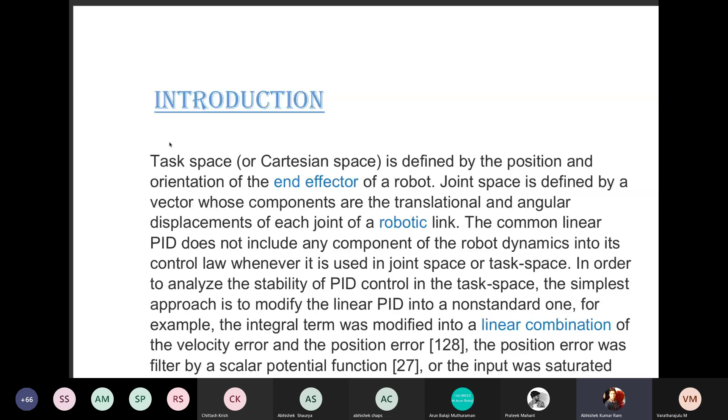Joint space and task space regulations are two of the most common control schemes for robot manipulators. Since the final control goal is normally in task space, it is more natural to design a robot controller in task space. Task space PD control is the simplest scheme to control robot manipulators.

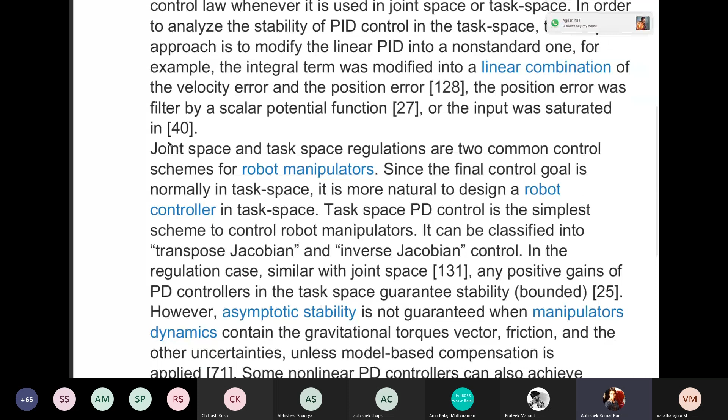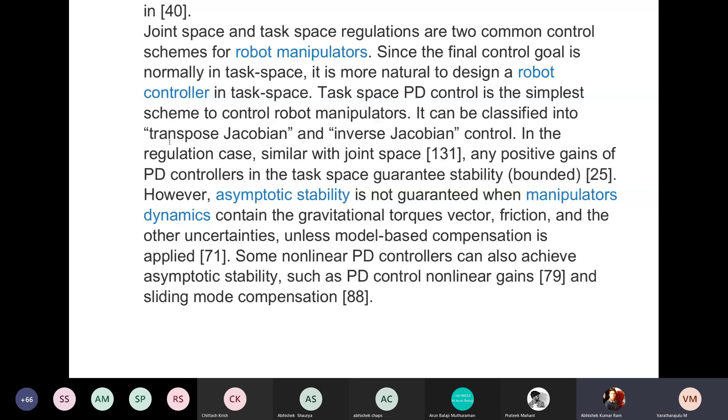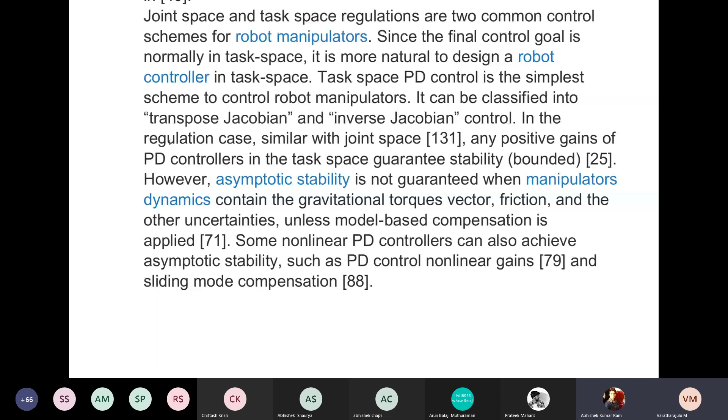It can be classified into transpose Jacobian and inverse Jacobian control. In the regulation case, similar to joint space, any positive gains PD controllers in task space guarantee stability bounded. However, asymptotic stability is not guaranteed when manipulator dynamics contain the gravitational torque vector, friction, and other uncertainties, unless model-based compensation is applied. Some nonlinear PD controllers can also achieve asymptotic stability, such as PD control with nonlinear gains and sliding mode compensation.

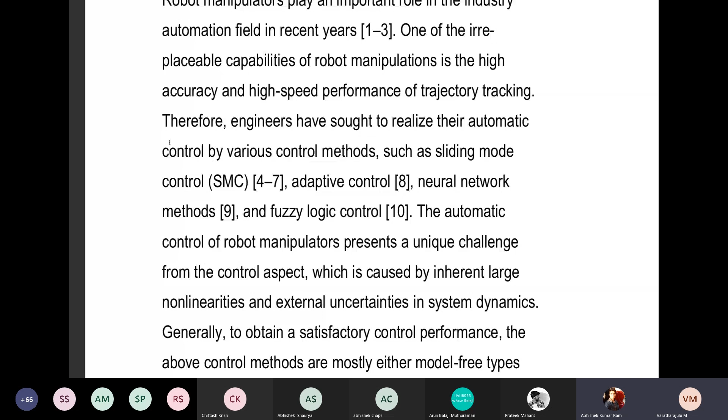Now let me give you a brief introduction regarding task-space robot manipulators. Robot manipulators play an important role in industry automation in recent years. One of their irreplaceable capabilities is high accuracy and high speed performance of trajectory tracking. Therefore, engineers have sought to realize automatic control by various methods such as sliding mode control, adaptive control, neural network methods, and fuzzy logic control.

The automatic control of robot manipulators presents a unique challenge from the control aspect.

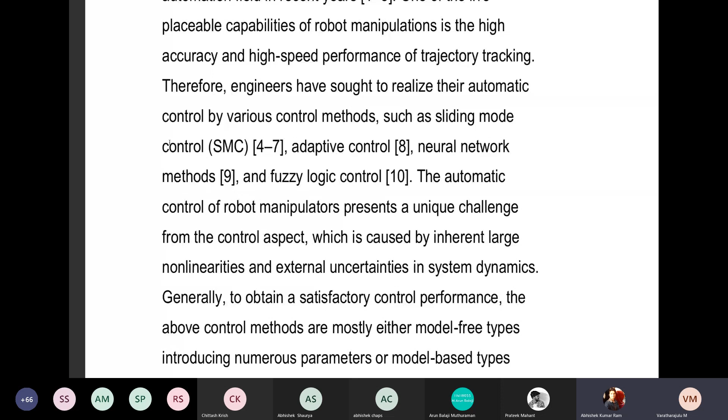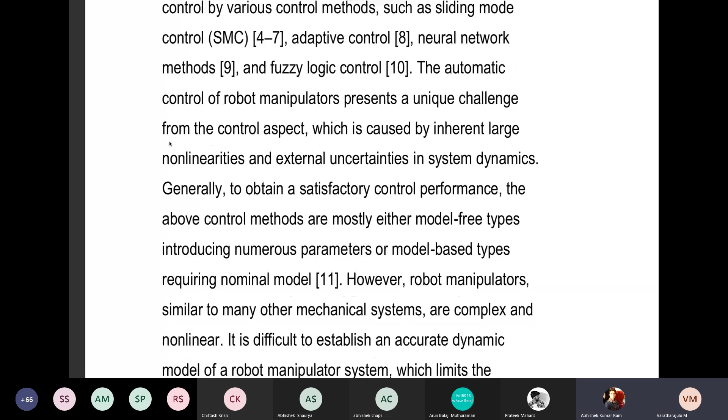Concerning neural network methods and fuzzy logic, you can find some papers in my name also. I have worked on fuzzy logic and neural network, which is categorized as AI, artificial intelligence. You can go to Google Scholar and search my name with fuzzy logic and neural network, you will find some papers. Okay sir, go ahead, it's a very interesting topic related to artificial intelligence.

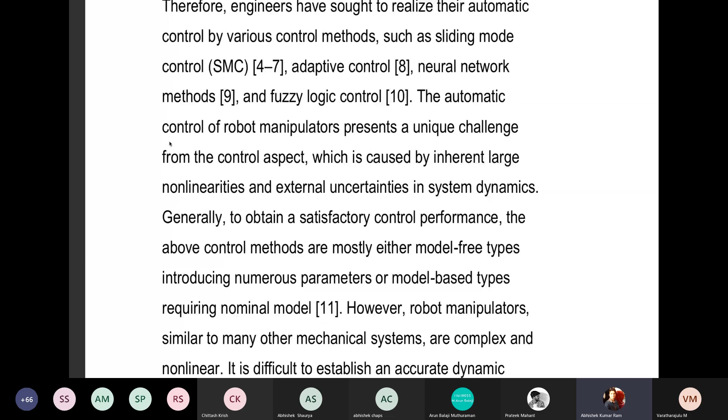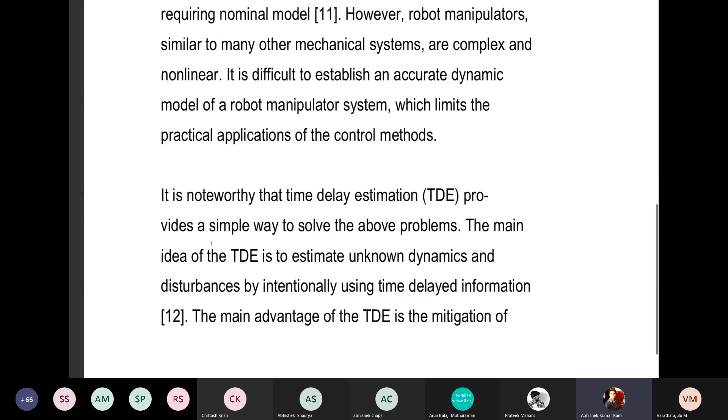With this note, I end my introduction on task space and hand over to my teammates so that they can present the next topic. Thank you.

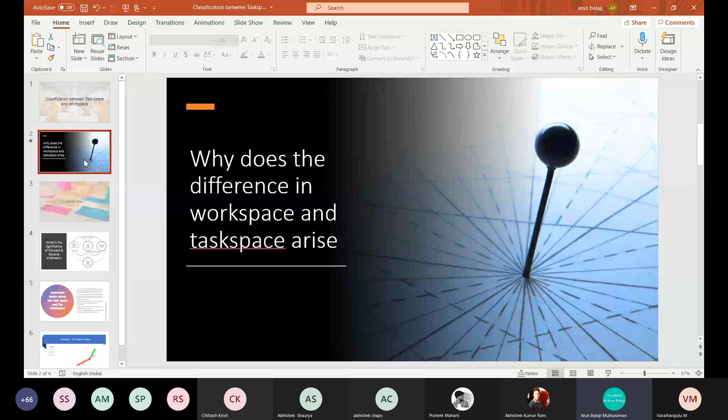Next, it's time for an activity. One simple activity: what will be the workspace for a hand? Can anyone come up with an answer? A normal human hand, right hand.

Anyone, can you please come up with an answer? Sphere. Yeah, sphere. Okay, you're correct.

So according to this, you can even have a right hand behind your back, right? Because the workspace is here and behind your back is also part of the workspace. But can you write at that point?

Writing, is it possible? Yes or no? Yes, you mean you can write with your hand behind your back? Yeah. Okay, maybe you're one special kind of human being. But it is very difficult, and 99.99% of the time you can't do it.

Therefore, behind your back is not a task space. Just in front of you, 25 centimeters below your eyesight, is your writing space, and that is the task space. Exactly.

Next one, Abhishek Kumar Ram also told us something about joint space. What is the relation between a joint space and a task space? From joint space to task space, we use forward kinematics, and from task space to joint space, we use inverse or reverse kinematics.

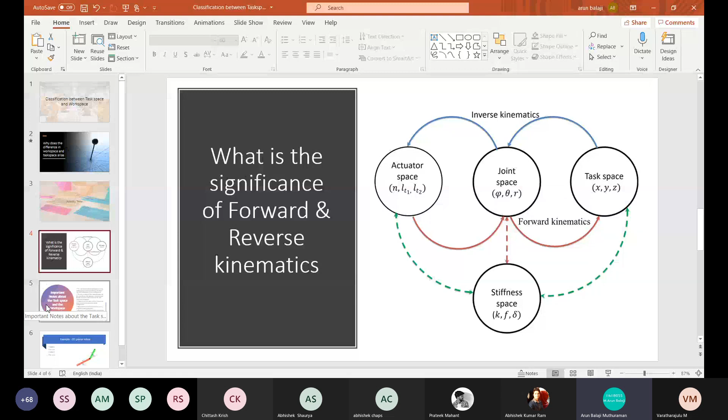Next, I'll sum everything up and we'll come to a common conclusion. Important notes about the task space and the workspace: task space and workspace relate to configurations of the end effector of a robot and not of the entire robot's configuration. Yes, that's true.

If there is a 2D linear robot with just two linear joints, linear links with rotational joints, then it is same as having four links which sum up to the same length of the two links with rotational joints all linear. They are the same, right? But their configurations are different. End effector configurations are a bit different.

Hence, we cannot talk about a robot by just knowing the task space and the workspace. Next, the user can decide that some freedoms of the end effectors, for example its orientation, do not need to be represented for the task space and the workspace. Like I just gave you an example of a laser: the rotation along the axis of the laser need not be mentioned because that is not of any use for a task space.

Next, we have a point in the task space or the C space. C space is nothing but configuration space. It can be reached by more than one robot configuration. We all know forward and reverse kinematics diagrams, right? It is same as going from 1 to 1 in the Cartesian plane: 1,1 to 0,0; 0,0 to 1,1; 1,1 to 1,2; 0,0 to 0,2; and 0,2 to 1,2. It says the same thing over here.

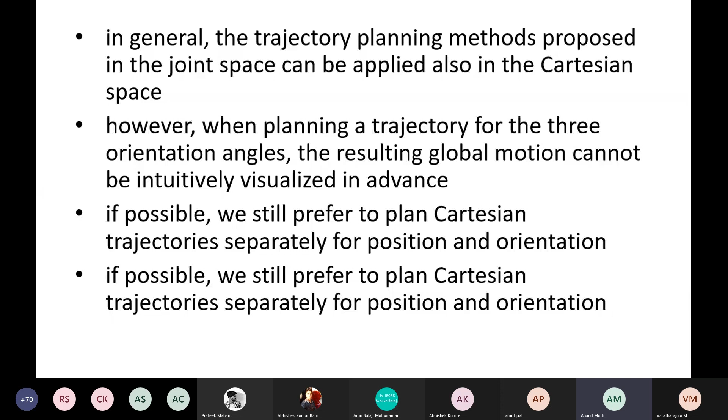A very important concept in any trajectory is interpolation, and one part of interpolation is polynomial interpolation. If we assume a function of points, let's take the example of q(t), which is a third order polynomial, there are four variables: A, B, C, and D. For us to solve this equation, we need four constraints: the initial point q0, the end point q1, the velocity at the initial position, and the velocity at the end position. We can find the velocity easily by differentiating the first equation.

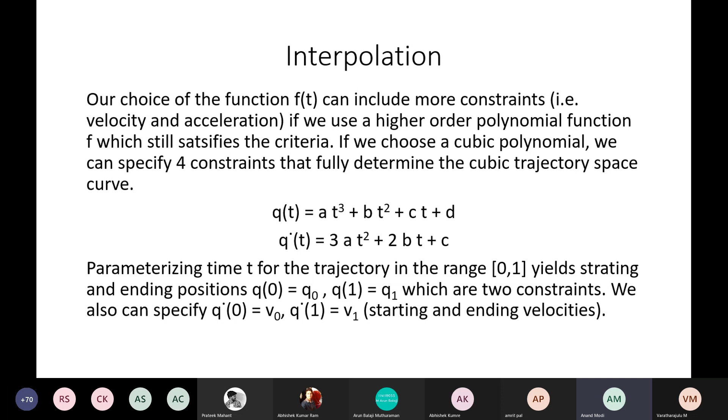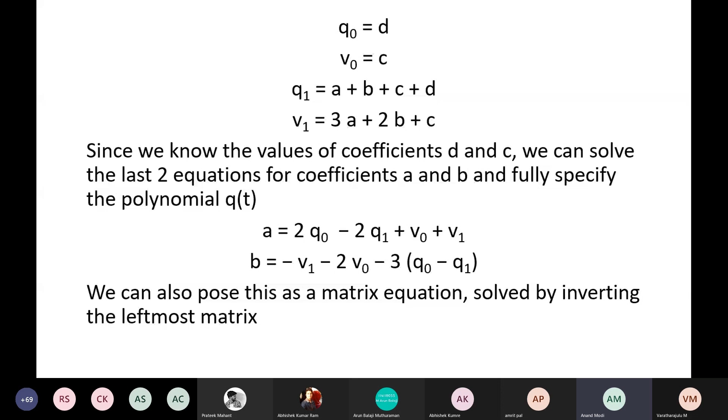A very important thing here is that we are parameterizing the time limit, which is in the range of 0 to 1, which can be considered as 0 second to 1 second. Since we have these constraints, we can easily come up with values for variables C and D, and also form equations according to Q0, V0, Q1, V1, which result in the following four equations. Since we have the values of C and D, we can express A and B in terms of V0, V1, Q1, Q0, giving the following two equations. This can be solved using normal linear algebra with matrix manipulation.

This is the function in which we equate the constants to the variables, and by taking the inverse of the matrix, we can find A, B, C, and D.

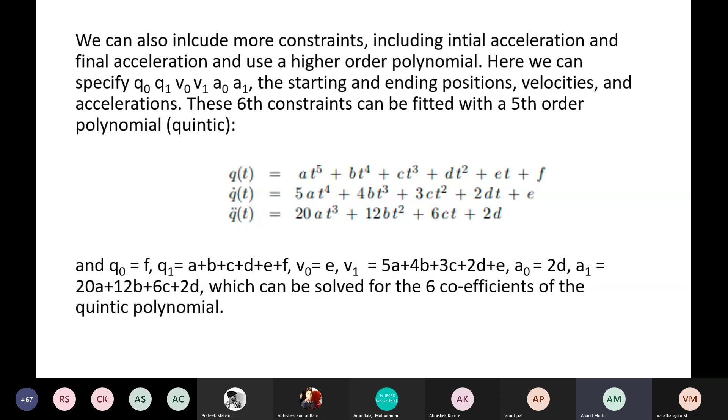In order to solve higher order polynomial equations, we would need more constraints. For instance, if there's an equation which is n order, we would need n plus 1 constraints to be defined. Here it's a 5th order degree polynomial, so we would need 6 constraints, which are basically initial and final positions, initial and final velocities, and initial and final accelerations. According to that we would manipulate to get the values of Q0, Q1, V0, V1, A0, A1, and we would perform the matrix manipulation again.

Planning a very simple task is straight line trajectory planning in Cartesian space. It is an important part for industrial robotics, used in welding a linear seam, painting a car, or even conveyor belts. How we do it is, given start and end points, we divide it equally in the task space, and then we compute the inverse kinematics on each of those n interval points, and then we move the robot with the inverse kinematics solution associated with each successive Cartesian interval.

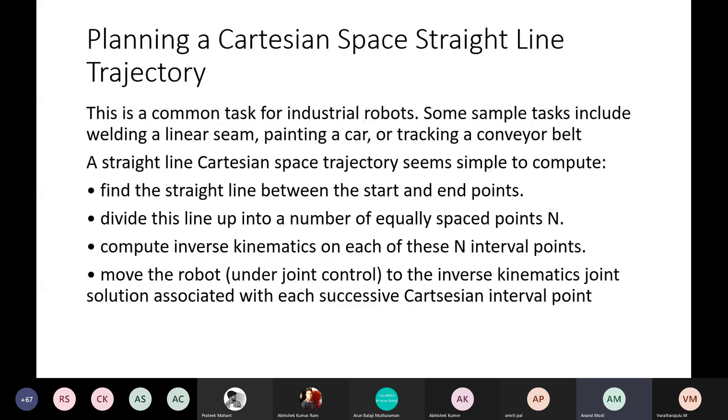As I initially said, it is preferable to use the Cartesian or task space because it is easy to visualize the trajectory and it gives us the desired path we want. The cons are that we need inverse kinematics to be calculated, which can be computationally heavy, and smooth trajectories are very hard to map on the Cartesian space. In Cartesian space, it also gives us the shortest Euclidean path, which is not necessarily the most energy conservative. A straight line path minimizes inertial force on grippers and anything it may be carrying. Cartesian trajectory can be robot independent too.

And yes, the cons are again it is very computationally demanding, and it has a complexity associated with it. Thank you.

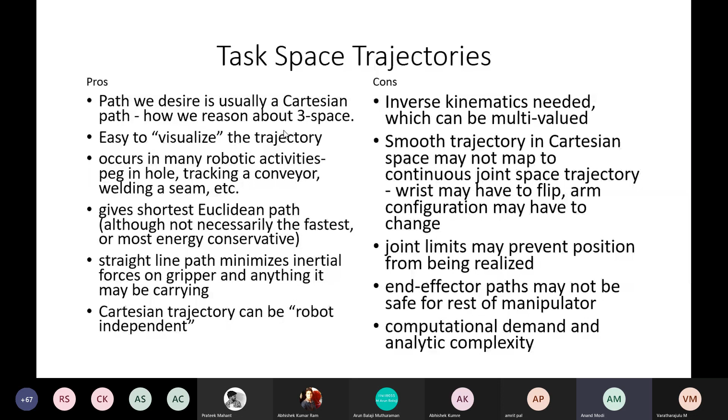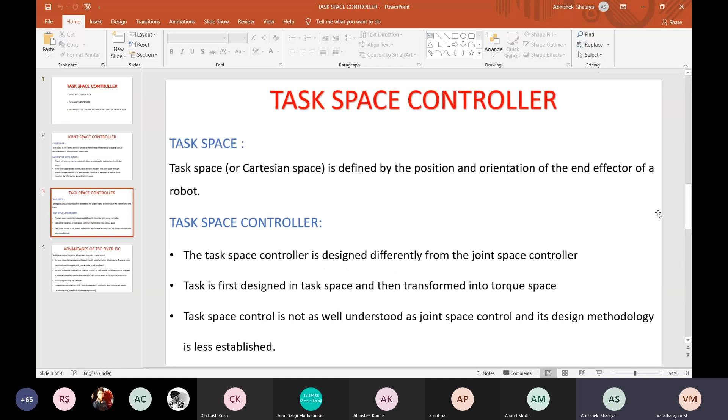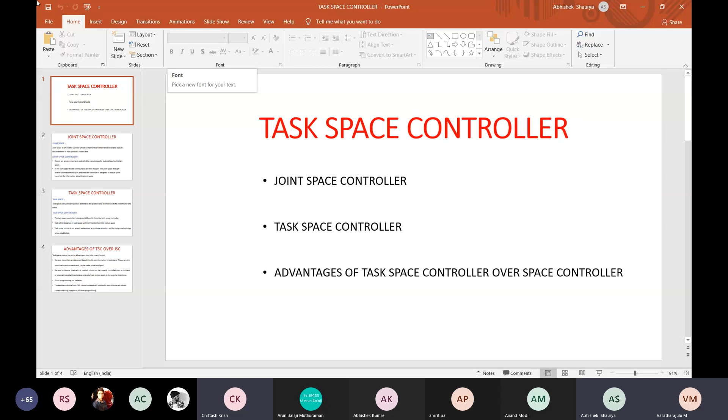Yes, how long we can take? Others, please respond. Abhishek, just a moment. Yes, sir. How long we can take? Others, please respond me. What was the subsequent class? Someone. Chittash, what was next class? Sir, unconventional machining. Unconventional machining. Today's class is that. Shall we continue the presentation till there are some 6 other people who have to present? How long can we take? Yes, anyway, we'll request Abhishek to... Yes, go ahead, Chittash. Yes, sir. We can continue till some 11:40 or something. Yes. Then okay, 11:40 will be okay. Okay, till 11:40. Okay, Abhishek, go ahead, Abhishek. Am I audible? Yes. Is the PPT visible? Yes.

So the topic is task space controller, and the subtopics that we will cover in this topic are joint space controller, task space controller, and advantages of task space controller over joint space controller. So the first subtopic is joint space controller.

Before diving in, let's quickly go through the definition of joint space. Joint space is defined by a vector whose components are the translational and angular displacements of each joint of a robotic link. Now, joint space control. First of all, robots are programmed and controlled to execute specific tasks defined in the task space. In the joint space-based control, tasks are first mapped into the joint space through inverse kinematic techniques, and the controller is designed based on the information about the joint space. Also, the robot is controlled to track the trajectory in joint space, and the trajectory in task space can then be followed because the mapping from joint space to task space is injective.

Joint space controllers can further be divided into two groups. The first one is classical joint control, and the second one is model-based control. Generic classical joint control approach does not consider the effect of robot dynamics. During the early days of robotics, even the interaction between the joint variables was ignored. This approach can easily be designed, analyzed, and implemented using the single input/single output classical PID, which stands for proportional integral derivative technique, because no computation is needed for complicated kinematic and dynamic effects.

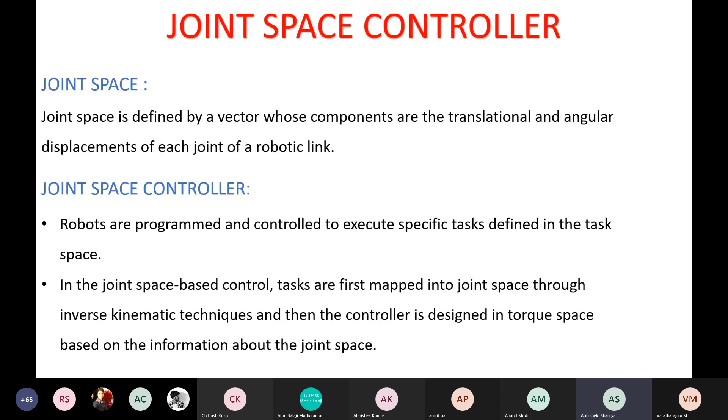First, let's recall the definition of task space that we saw in the introduction slide. Task space, or also known as Cartesian space, is defined by the position and orientation of the end effector of a robot. Now, task space controller.

In task space controller, the task is first designed in task space and then transformed into torque space. The task-based controller is designed differently from the joint space controller, and task space control is not as well understood as joint space control, and its design methodology is less established.

Also, task space controllers can be further categorized into position controllers and force controllers. The former refers to a robot whose end effector moves freely in 3D space, and the latter refers to a robot whose end effector is in contact with constraining environments so that some degrees of freedom are eliminated.

Before moving on to the advantages, it is important to know that whether in task space or joint space control, the task is always designed in task space, whereas control output is always realized in torque space. The fundamental difference between task space and joint space controllers is in their mapping relations from task to torque spaces.

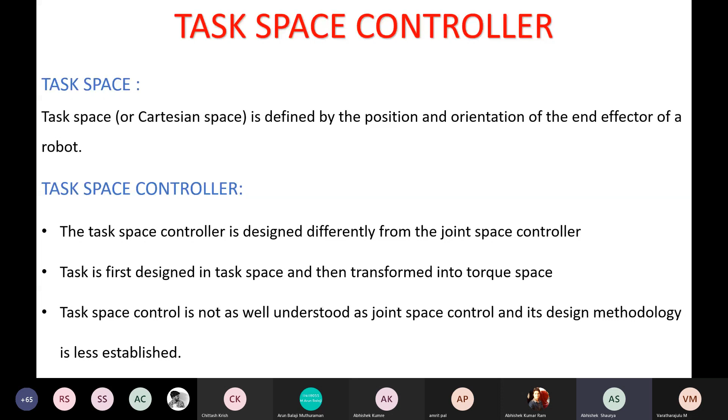Now let's move on to the advantages. The major advantage is that robot programming can be faster, and the geometrical data from CAD robot packages can be directly used to program robots, greatly reducing the complexity of robot programming.

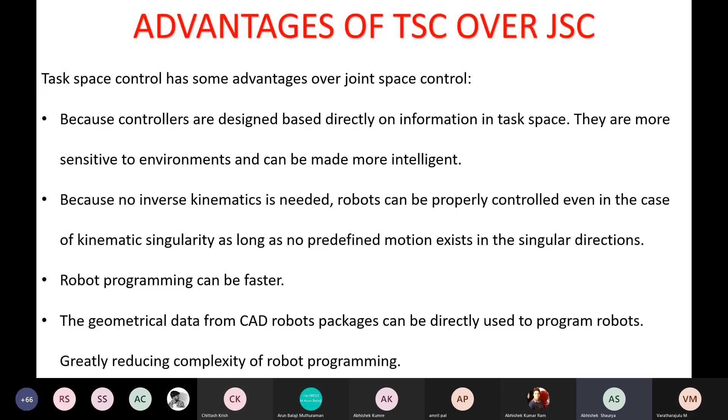Because controllers are designed based directly on information in task space, they are more sensitive to environments and can be made more intelligent. And because no inverse kinematics is needed, robots can be properly controlled even in the case of kinematic singularity, as long as no predefined motion exists in the singular direction.

Now Abhishek Chapatkar will take over and explain the design.

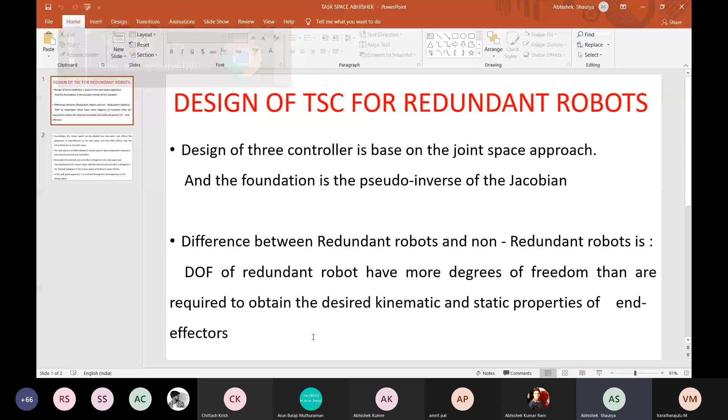I am Abhishek, and I'll be explaining the design of task space controller for redundant robots. So at first, we will see the design of the controller for redundant robots. Basically, its design has traditionally been based on the joint space approach, and the foundation of this design is the pseudo inverse of the Jacobian.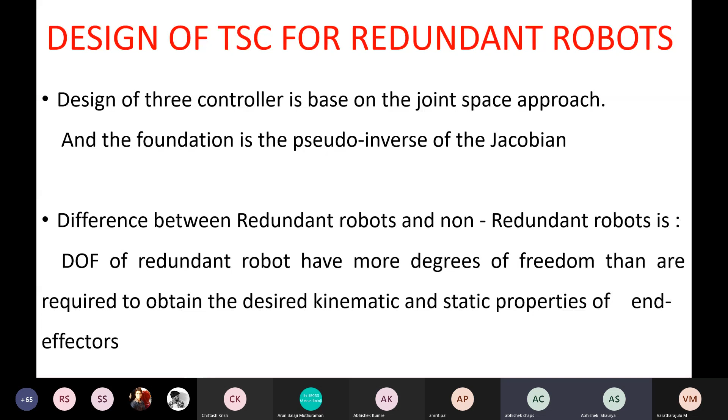Now we will see the difference between redundant and non-redundant robots. The redundant robots differ from non-redundant robots in that they have more degrees of freedom than are required to obtain the desired kinematic and static properties of end effectors. Abhishek Shorya, can you please move to the next slide?

Accordingly, the torque space can be divided into two parts. One affects the properties of end effectors in the task space, and the other affects only the internal motion in the joint space. In other words, whether the joint space or the task space approach is adopted, the controller of a redundant robot is composed of two parts: an external subcontroller for the task domain, and an internal subcontroller for the internal motion.

There are different approaches for developing task space controllers. Generally, the external subcontroller is designed in the task space and transformed into the torque space, and the internal subcontroller is designed in the internal subspace according to some criteria. But there is some dimensional inconsistency in this. In both the joint space approach and the task space approach, this dimensional inconsistency is resolved. In the joint space approach, it is resolved through decomposition of joint space, which determines the desired joint space trajectory, and in the task space approach, it is resolved through decomposition of the task space.

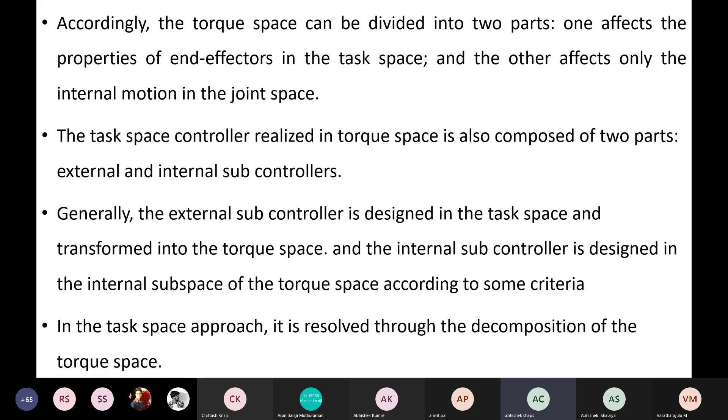So the next topic will be elaborated by Amritpal.

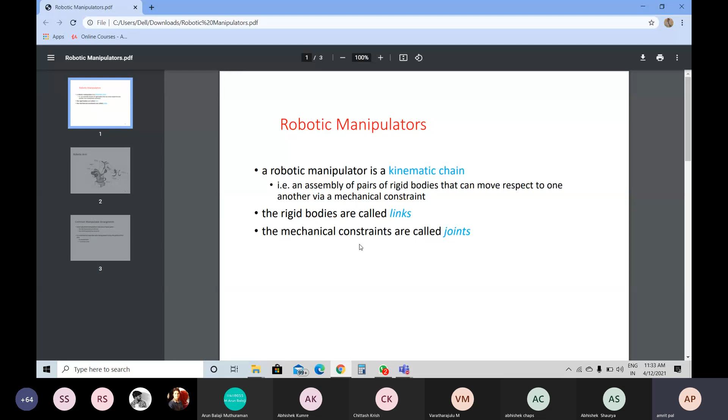A robotic manipulator is a kinematic chain, that is an assembly of pairs of rigid bodies that can move with respect to one another via a mechanical constraint. The rigid bodies are called links, and the mechanical constraints are called joints. Next slide is robotic arm. In assignments, we have talked about a question: what are the specifications for a robot?

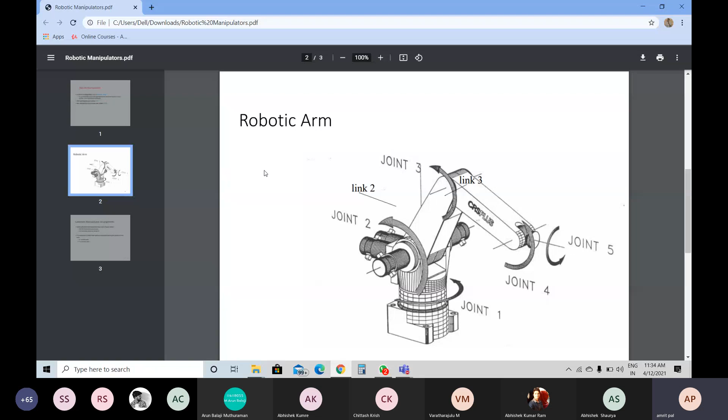We have given a point that a robot should work in a wide area, so its workspace approach should be large. Joints perform a good role in its workspace. If a robot has more joints, it can perform more area of work.

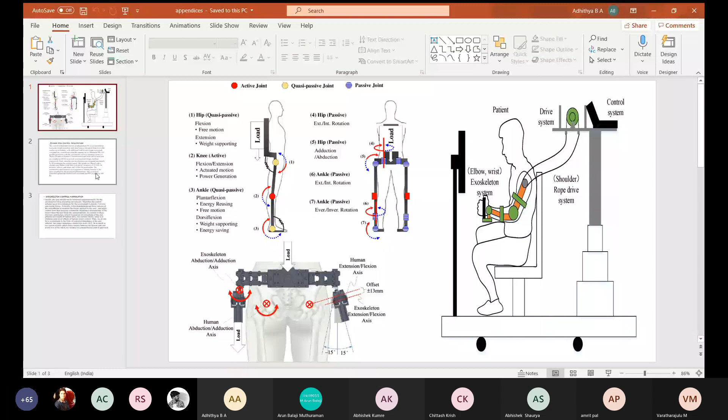Now we will be discussing exoskeleton control architecture. The control architecture consists of independent PD servo controllers at each joint, implemented on joint controller analog circuit boards, with feed-forward torque commands computed on a centralized controller running on two Motorola PPC603 parallel processors with the commercial real-time operating system VxWorks.

Next, potentiometer and load cell at each joint give positional and torque feedback respectively. Joint velocity and acceleration are computed numerically by differentiating the position signal. The signals are filtered with a second order Butterworth filter with cutoff frequency of 33.6 Hz for position, velocity and torque, and 4.8 Hz for acceleration, because the acceleration signal requires more aggressive filtering due to noise amplification by numerical differentiation. The centralized controller updates the feed-forward commands and PD set points at 480 Hz.

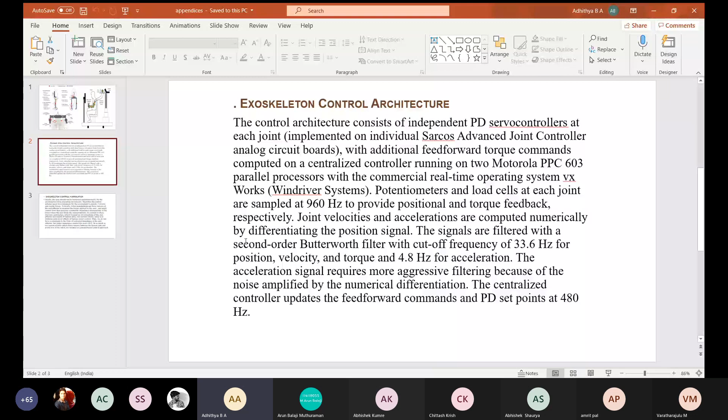Next, we will see about exoskeleton control formulation. Ideally, the user should not be burdened by the exoskeleton while executing movements. Therefore, the control scheme needs to compensate for the exoskeleton's gravity, Coriolis, and inertia forces. Typically, robot manipulators use a force sensor at the end effector to measure the force applied by the user and apply a control law that generates a particular impedance characteristic at the point where the user holds the manipulandum.

In contrast to these previous approaches, which focused on investigation of end effector movement of human arms, our current robotic setup is to engineer joint level effect of human motor control. Thus, we do not have a constraint in the form of desired impedance at the end effector, but rather impedance control of every degree of freedom, since we cannot reliably attach a force sensor between the human arm and every link of the robot. We resorted to model-based control approaches. These are to increase the stability of the robot. Thank you.